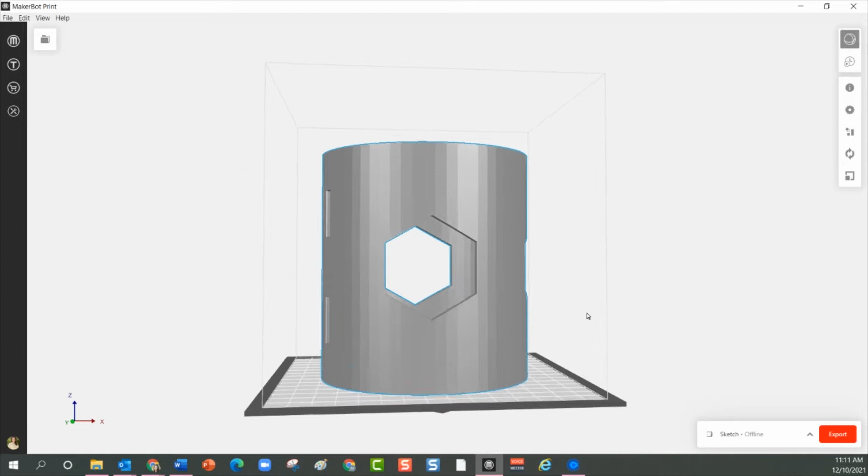Right now, I'm working with a sketch bed. So the plate area or bed area that I have is specific to a sketch model, but quite frankly it doesn't matter. Whatever type of printer you are working with, this same strategy should work just fine.

I have my model in here, and in my model I have these open areas that necessitate a temporary support so that the model can print properly.

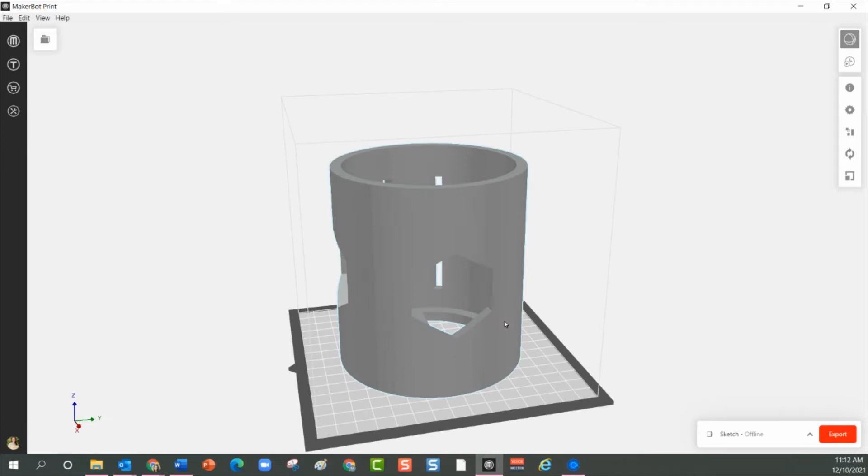Over here on the right-hand side where I have access to my toolbar, I'm going to click on the gear where it says Print Settings. Usually when you hover over it, it will let you know exactly what that item is. I'm going to click one time.

If your print settings do not look exactly like mine, you could potentially have a smaller view. These little items will tick so that you can expand or shrink any of those areas. And if they don't show up at all, you can scoot over to where it says Custom Settings. In either of those locations, you can make these choices.

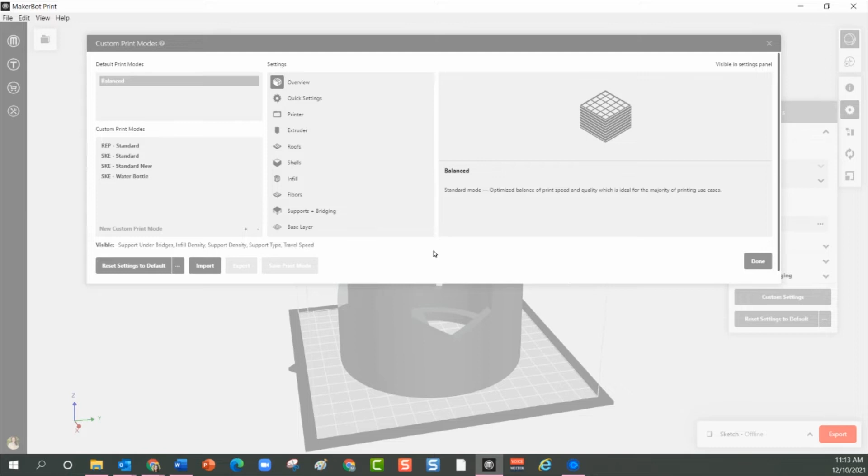What I'm specifically looking for is supports and bridging. I'm going to click one time right over here so that this panel appears.

And what I want is I want supports to appear under the bridge. So I can tick the mark, the little box right here, in order to ensure that the supports will be supplied during the actual print process.

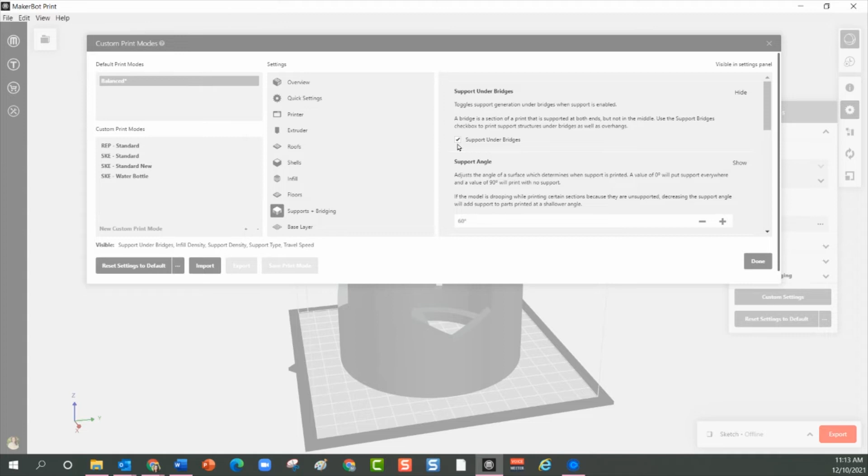If you do not tick this box, or another box that I'll show you in just a second, then your supports will not appear. This is something the user must choose. You cannot assume that the software is going to make that choice for you. So I'm going to tick that box and then click Done.

The other location where it would appear if these items appear in this area is right here where it says supports and bridging, and I'm going to tick the arrow so that this expands. You can see in this area that you have some choices.

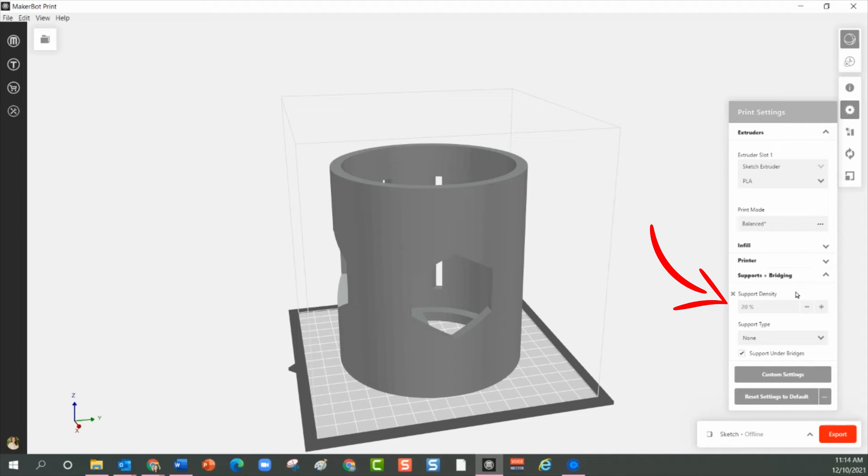Right here where it says support density, you're choosing the thickness of those supports. I typically choose 13%, and here's the reason why: number one, it is using a small amount of filament; number two, I know it will be stable enough to support my print.

You, as the user, get to choose the density. If you want to go less than 13% and practice with 12, 11, 10, etc., you're more than welcome to choose those. I find that 13 is fine. If you're wrestling really hard to break those supports away, I recommend a smaller number so that it is less dense.

Right here where it says support type, instead of none, you would choose breakaway support. Make sure you have chosen breakaway supports in this area instead of none if you need supports during your print process. And in order to see what this looks like, I'm going to come all the way up here to the estimates and print preview area.

This process, I would say, depending on the size of your print, could take a minute or a minute and a half for the computer to render an analysis, an overview, a time lapse of exactly what that slicing would produce. How many layers? What do those layers look like?

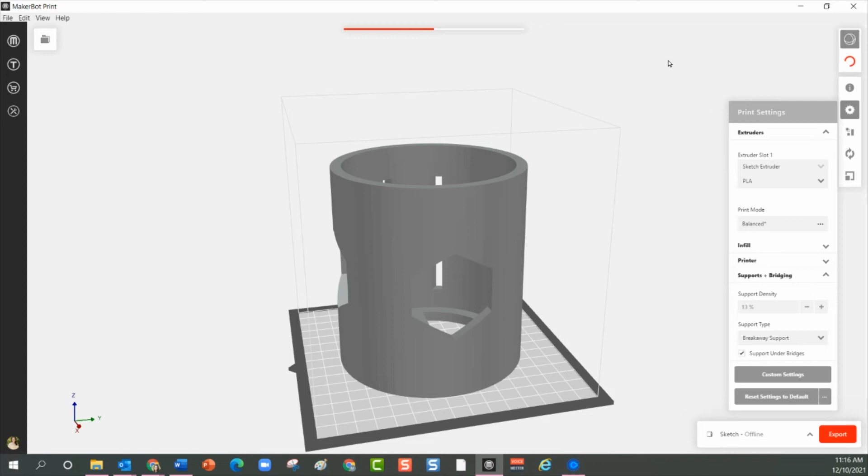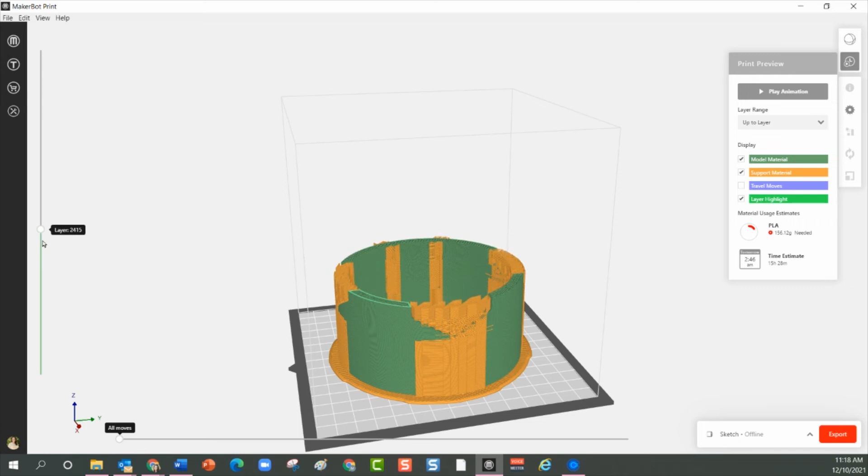Because this print takes over 15 hours to run, it took almost 3 minutes for that rendering to appear. And I can evaluate over here. I have clicked this little bubble and I'm dragging it down. I can evaluate whether or not I am satisfied with this print process.

If I think that the interior density of this particular print is excessive or does not provide enough support, this is where I can evaluate and ask questions.

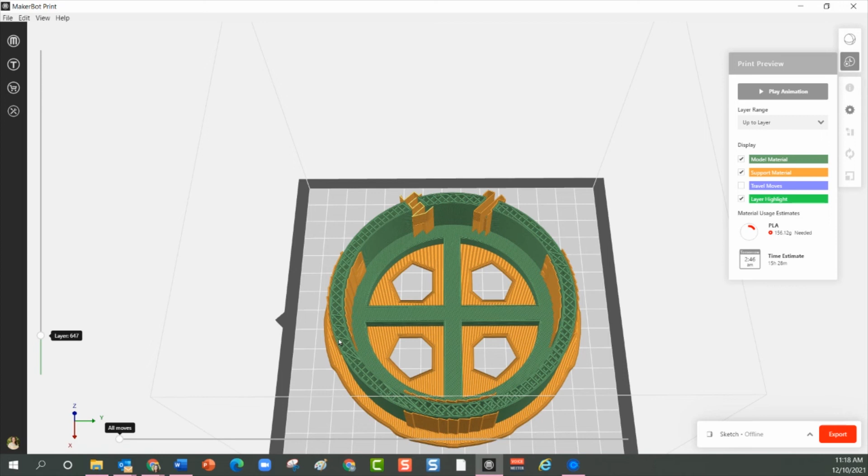Am I satisfied with this print? Do I feel like I need to make adjustments? Do I want to wait 15 hours for this print to run? It is at this time that I can go in and make adjustments. I'm not limited to just clicking export and running at this point. I absolutely can go back and make adjustments if needed.

If you are satisfied with your print, you can export and print accordingly. If for some reason your supports are not on display, you would click this box right here in order for those supports to disappear or to reappear.

Now, it doesn't mean that the supports are disappearing in the print. Let me bring clarity to the discussion. The only thing we're doing at this point is visualizing it or not visualizing it. It's still going to print because we chose it on that last screen.

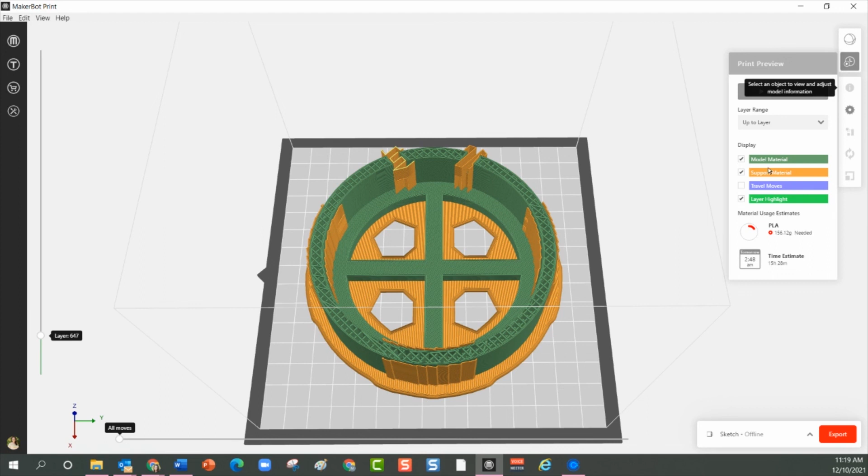Back when we were over here in this print area, we chose it. The only thing that's different in this particular section when we tick on or off away from this orange area is that it's just hibernating or it's not on display.

So you can still see how the print is a little bit above that print bed in order to accommodate the raft that's going to print. So that is still clearly there. And the supports are clearly going to print.

The only thing we're doing right here is you'll see the word display. It's just whether or not you can visualize that component right now on the screen or not.

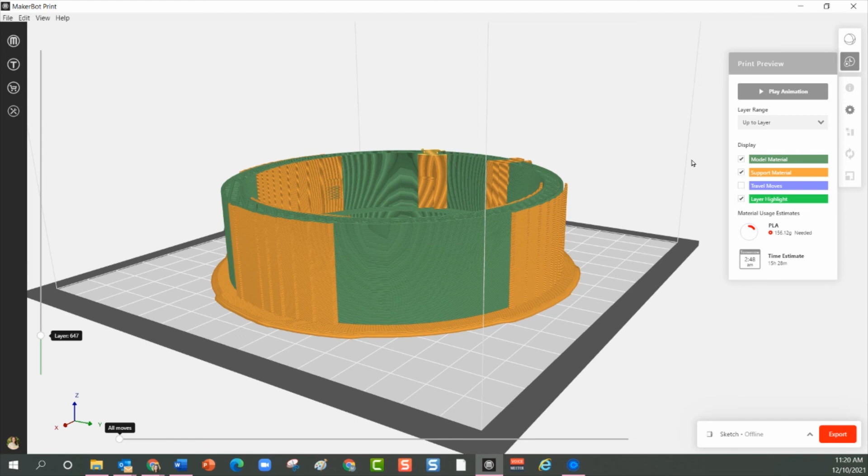All right, my main objective was to make sure that you understood the support material process. That was my only objective for this particular video. Thank you for watching and have a great day.